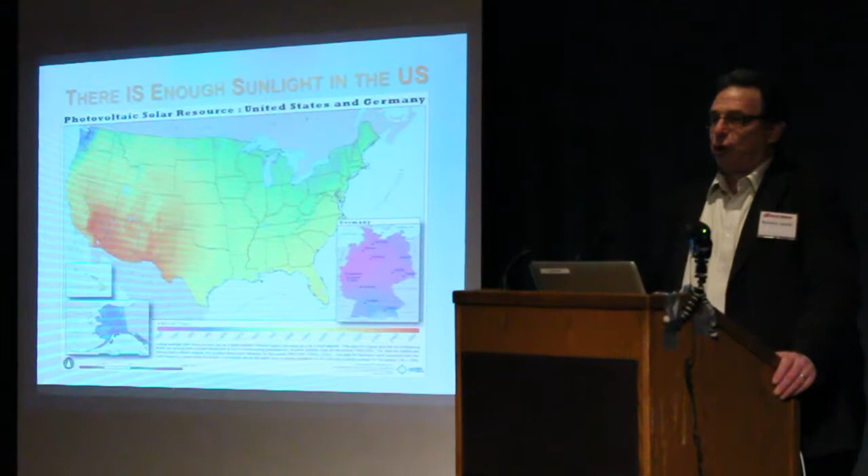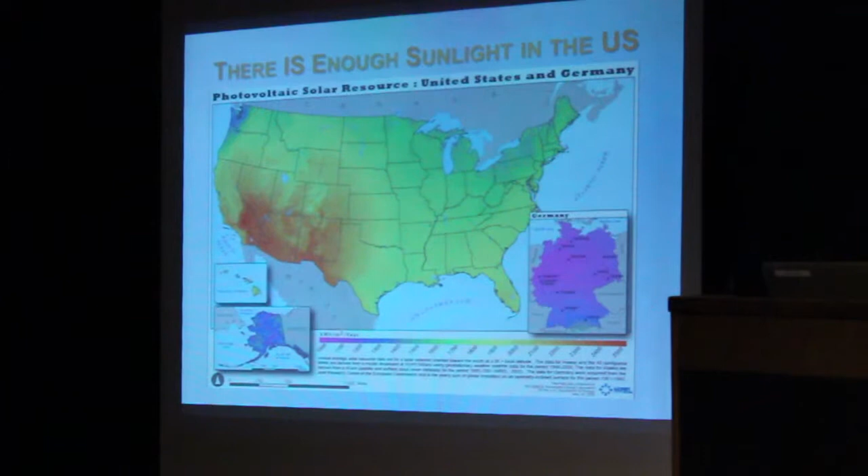That's pretty remarkable. Well, it turns out the largest solar power country in the world, not just per capita, is Germany, because they have policies that encourage it. And if you look at a map, that's Germany. That's the amount of sunshine they get on an annual basis. The closest in our country is Alaska and Seattle. That matches Germany. So if they can do it in Germany, trust me, we can do it in Chicago.

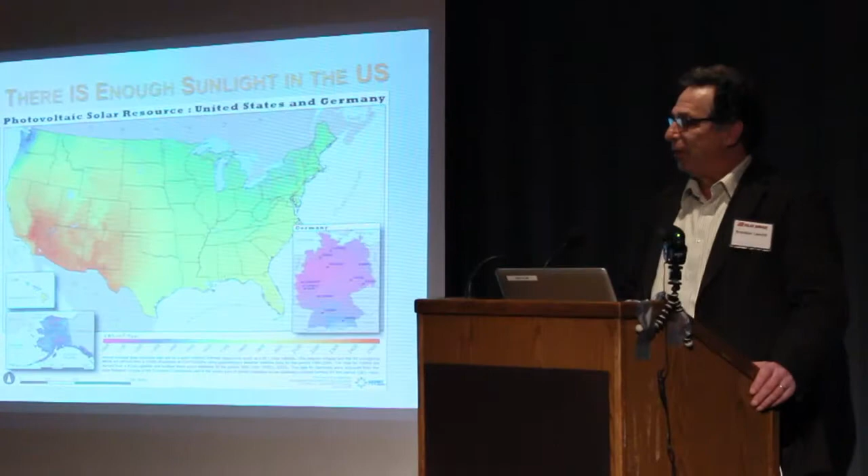Now, the coldest day of the year is also the brightest. So it turns out the further north you go, the more valuable sunshine is. We need it more. Don't use solar to heat your home in Florida. It's a waste of money. But here, we're going to use it 7, 8, 9 months out of the year. That's valuable.

And I talked a little bit about the shift to solar. Last year, in America, we doubled the use of solar energy over the previous 30 years. In 2 years, we'll double it again. That's how fast it's coming on. But we're catching up. China's ahead of us. Yeah, they have a lot of dirty energy, a lot of dirty coal, but they're also the leader in clean energy. Saudi Arabia is going to go from 0 to number 3 over this decade. They just realized oil's too valuable to burn. It's a great export product.

They got a lot of sunshine, a lot of desert, a lot of place for solar panels. They're going to go big. India is doing it as well. Europe is investing in solar plants in North Africa to supply electricity through a cable under the Mediterranean to Europe. So they're going where the sunshine is. And this is where the jobs are. These are jobs that cannot be outsourced.

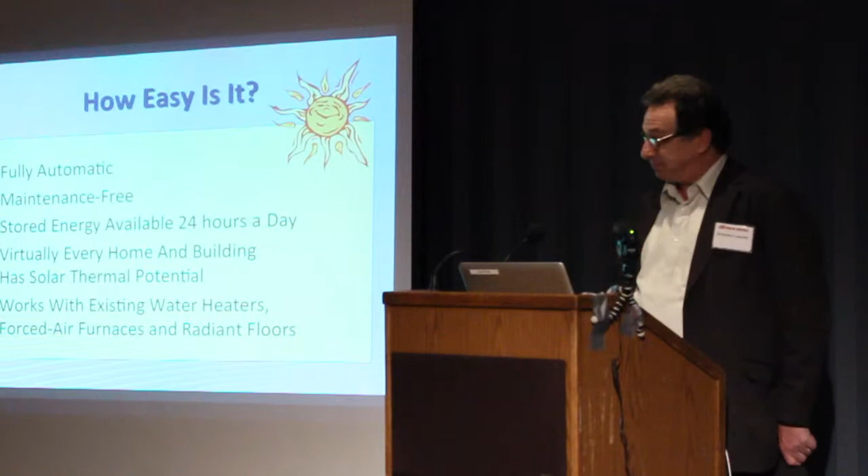And a 4x8 solar panel produces over 1,000 gallons of hot water a month here in Chicago. That's amazing, a little 4x8 solar panel. Think of a piece of plywood. But it's a glass-covered metal box, and it can make 1,000 gallons. A family of 4 just needs 2 of them.

And the nice thing is, those 2 panels, the CO2 displaced, which is a greenhouse gas contributor, we can reduce it to the equivalent of planting 2.5 acres of trees every year. So after 10 years, it's like you just planted 25 acres of trees. I've always wanted to do an ad where we have solar panels on the roof and we say, plant 25 acres of trees, because that's the equivalent of it.

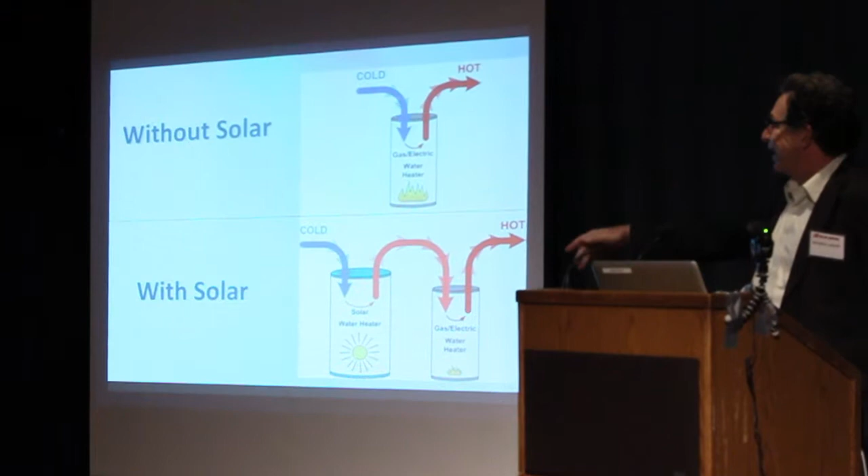So again, here's the simple description. Currently, you have a water heater: cold comes in, hot goes out. With solar, you have a solar preheat tank, solar heated. Cold water now enters that tank, it leaves, goes into the backup tank. 70% of the time, it's hotter than what the tank is required.

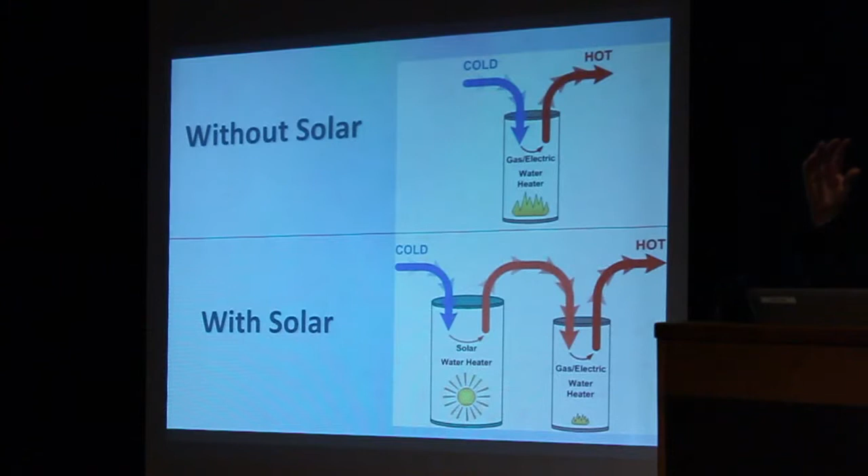In fact, we put a cooling device on our water to make sure you don't burn yourself, because we set our tank to 170 degrees. We used to set it to 180, but we found out it ages the tank. So we set it at 170, we blend it down to 120, 125, and then it goes into your water heater.

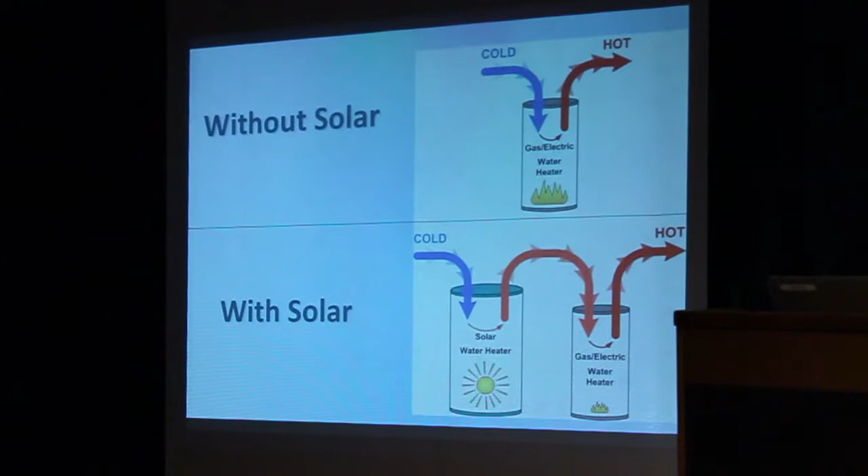Our combination system is solar panels. There's always a heat exchanger in between, because the water that we bathe with does not go through the solar panels—that would freeze. So we always have a closed-loop indirect system. We put the energy into storage, we preheat the water, and we have a nice coil in the furnace.

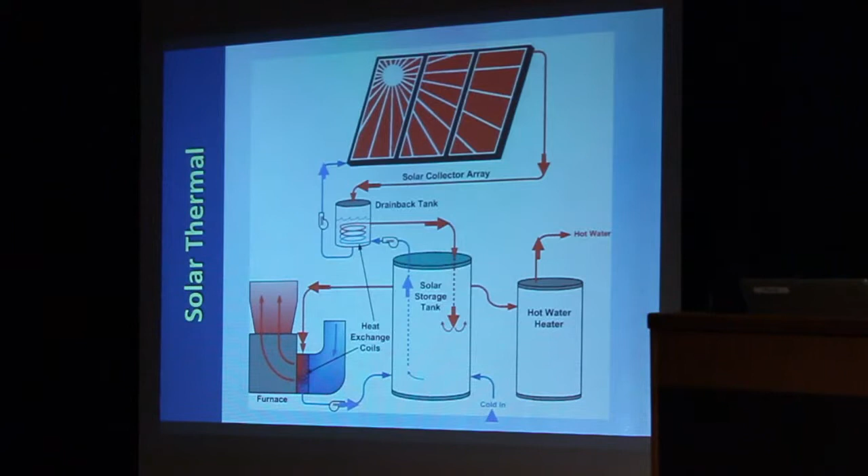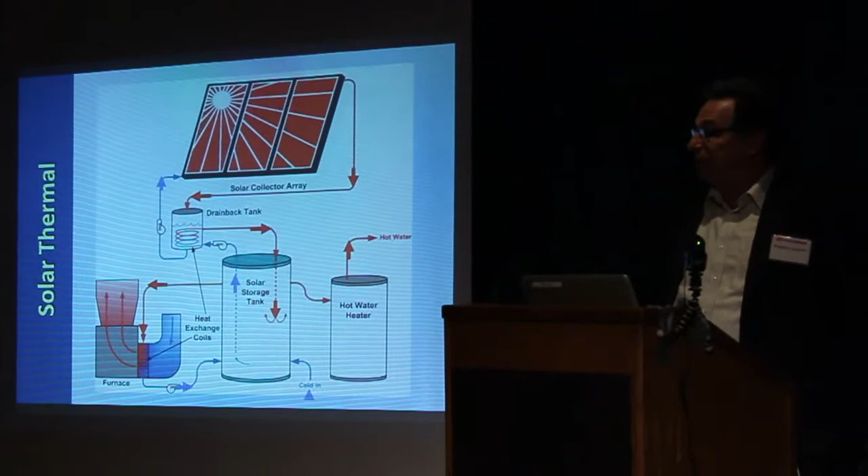Now, we'll do new homes that are built to higher standards. We can do a higher percentage.

There's an example. We work with radiant floors, there's the coil in the furnace. Sometimes we can deliver solar heat to a room that's hard to heat, so you don't have to overheat the rest of the house just to keep that room comfortable.

The one thing we don't work well with are radiators. Not too many in Northbrook, but when we go to Evanston or Oak Park or Chicago, there's a lot of homes with radiators.

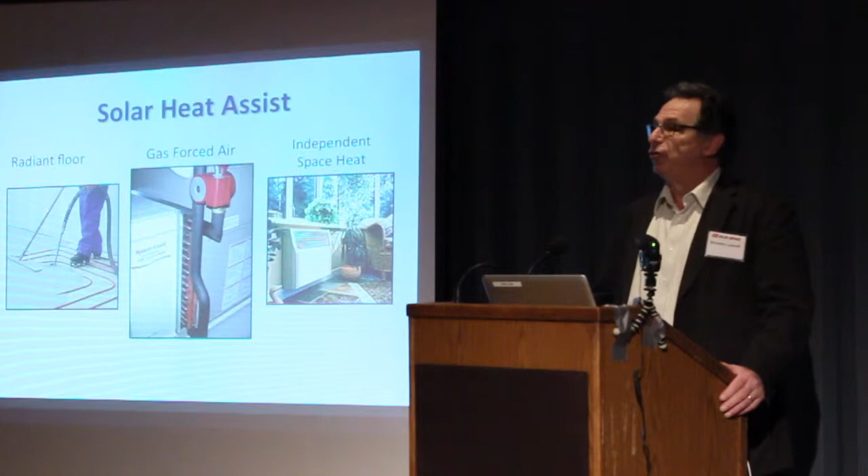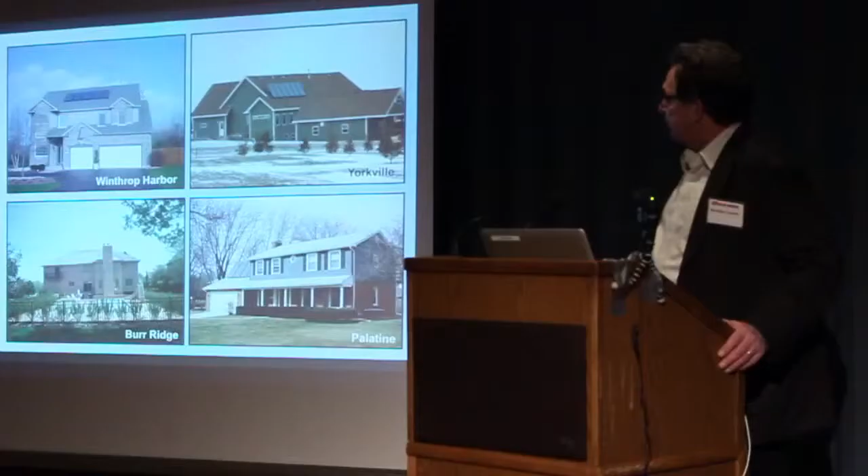They work at too high a temperature for solar to really be effective. So quickly, just a lot of examples of solar. Solar thermal panels should face south, because most of the time they're going to be on the side of the house in such a way you're not going to notice them, or they'll look like skylights. Once in a while, we'll find a house with an east-west roof, of course, but we point the panels south. We can still deliver a lot of solar heating.

We've done vacation homes where not only are we heating the water and heating the space, we're heating a hot tub. And some newer homes, 3 floors of radiant heat in the Chicago house are getting solar heated. Sometimes we'll put the panels on the garage, detached, just have a couple of underground pipes going into the basement.

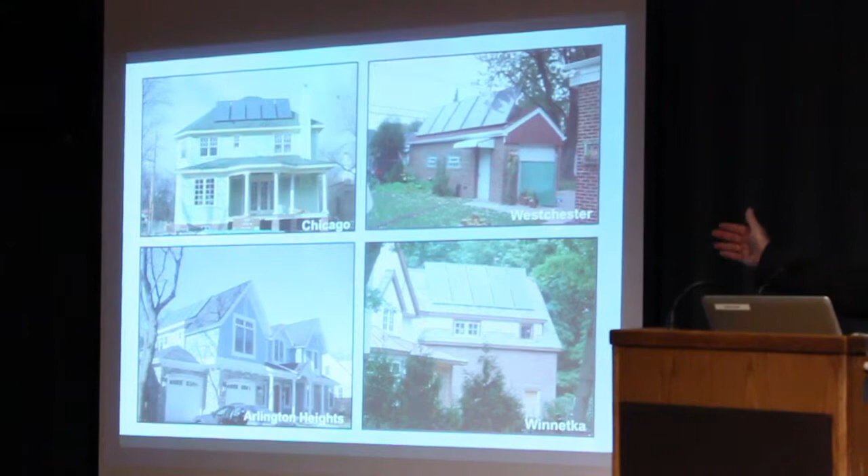Beautiful new home in Winnetka. This woman's involved in Go Green Winnetka, so she walks the talk, as we like to say.

Oh, there's that house in Arlington Heights. Did that a couple of years ago. It was an Energy Star rated. It got the highest rating of any home the rater ever looked at. It's about 1.5 times the size of the typical house on the street, has half the heating bills. All they did was super insulate the house with foam, get good energy efficient equipment, nothing fancy, and solar. They got half the heating bills.

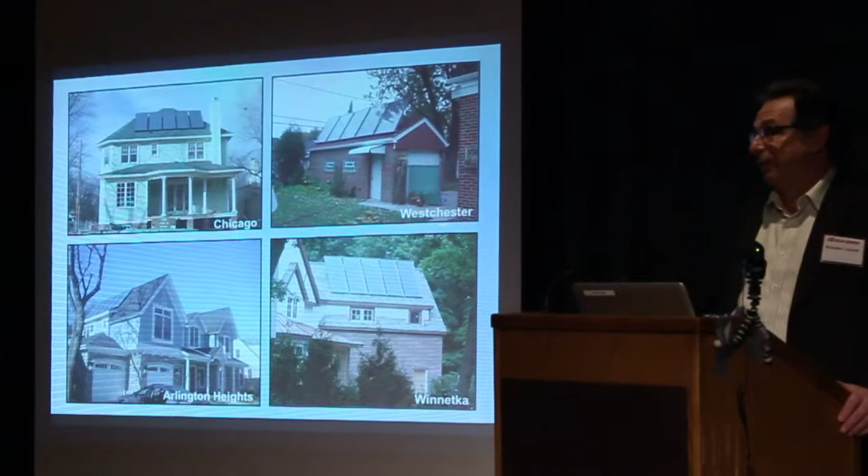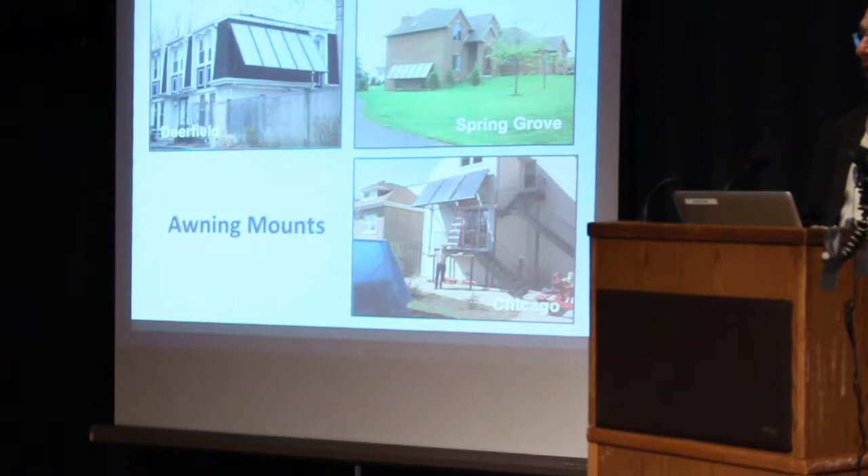Sometimes the roof isn't going to work, so we'll get creative and we can do an awning mount. We'll mount them on the side of the home. This lower picture, family was really happy we did it that way. They couldn't even use that room in the summertime. It got so hot. We cooled it about 25 degrees in August. Solar intercepted that heat. So we'll take a little credit for cooling as well as heating.

We get asked all the time about economics. Quick story about a family in Antioch. I met him in an energy fair. He was upset. He was on a budget plan where he paid the same amount of money every month for his gas bill. Gas company sent him a notice it's going up 50%. He got upset. He had a family of 4. We gave him a 5-panel system.

Chicago Tribune covered this in a story a few years back. After the solar was installed, his first gas bill for 2 months was $29. He complained to the gas company, and they recalculated his budget from $158 a month down to $70. They also issued him a credit for his overpayments of over $450, which covered his entire gas bill that year. So, you know, it does save money.

In fact, I got into solar because it's a less expensive alternative. If you're not using the sun to heat your water, you're spending more than you need to. It's really about economics. Yeah, it's great that we're helping the planet, saving the world, making it a little bit better for future generations. But it's really, the green I care about is what's in your wallet. And it's a better, smarter way to provide energy.

So speaking of how affordable it is, it's a lot more affordable than people think. A typical solar water heating system for a family of 4 installs for about $12,000, $10,000 to $12,000. But after incentives, you get 60% off, and the cost is down to $5,000. We double that when we deliver heat and hot water.

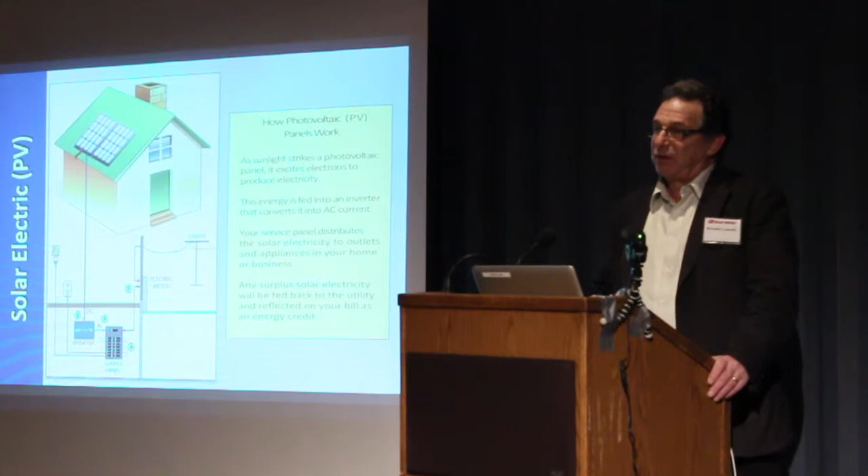Okay, now quickly we're going to talk about solar electric, because this is now the fastest part of our business. About 2/3 of our customers today, probably about 90% of our residential customers, are going solar to create electricity. And it's very simple.

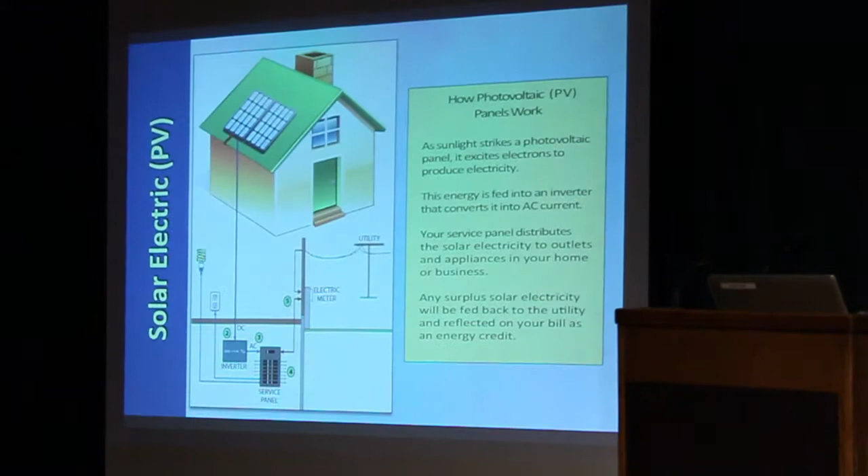This is a working solar cell made by SunPower. It's evolutionary, it's revolutionary. The only way electricity has been made over time is with heat, steam.

A nuclear plant, a coal plant, they all boil water, create steam, move a turbine. Hydroelectric uses gravity, but again, a turbine. Wind generators, turbines. Something mechanical, something moving. This is passive.

Sunshine hits this, excites the electrons, they jump out and look for a place to go where they're needed. There's never been a device like this before. And this is going to be the standard way to generate electricity on our planet.

It was developed in the 50s by AT&T to power repeater stations. It's a long way to run an extension cord or recharge batteries. Satellites, of course, are powered by the sun. The space station turned 15 years old yesterday. Solar powered, of course. So this is a very exciting technology.

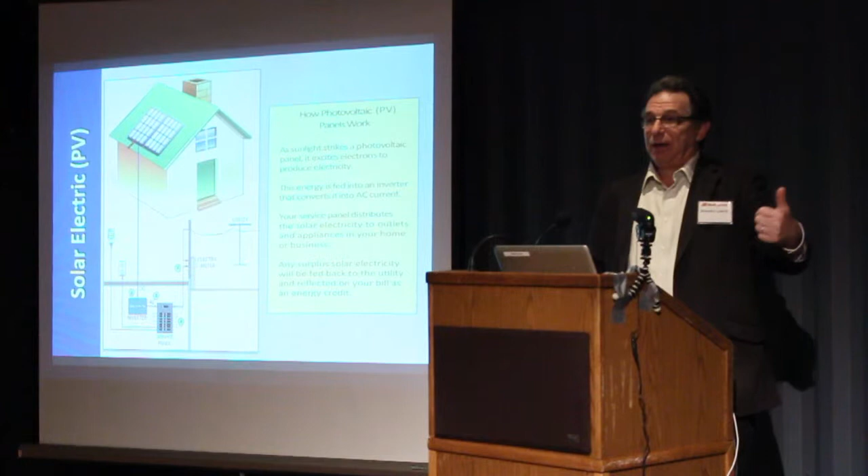What's changed over the last couple of years is something called net metering. It used to be when we installed solar, we tied it to batteries, because most of the time during the day we generate more power than the house needs. Batteries added to the cost, required space, maintenance, and there were safety issues as well. Very few of our customers use batteries today.

Most of them connect to the grid because the law requires the utilities now to accept that excess power and give it back to you later at full retail value. It's called net metering, and it's lowered the cost and simplified the system.

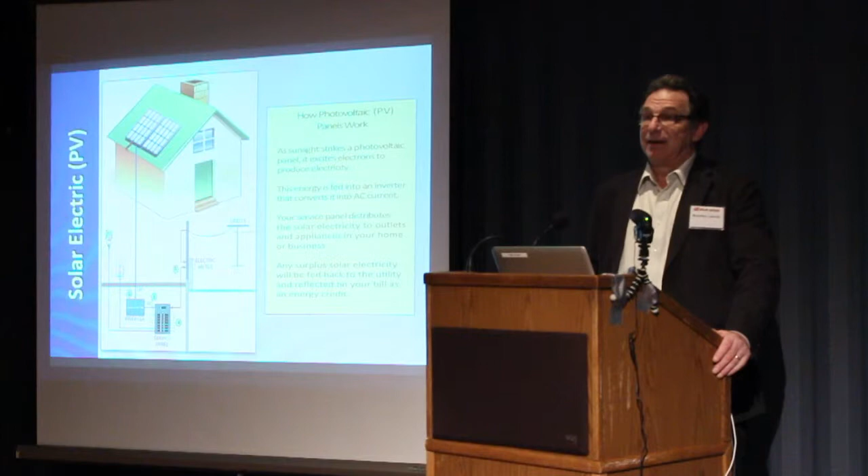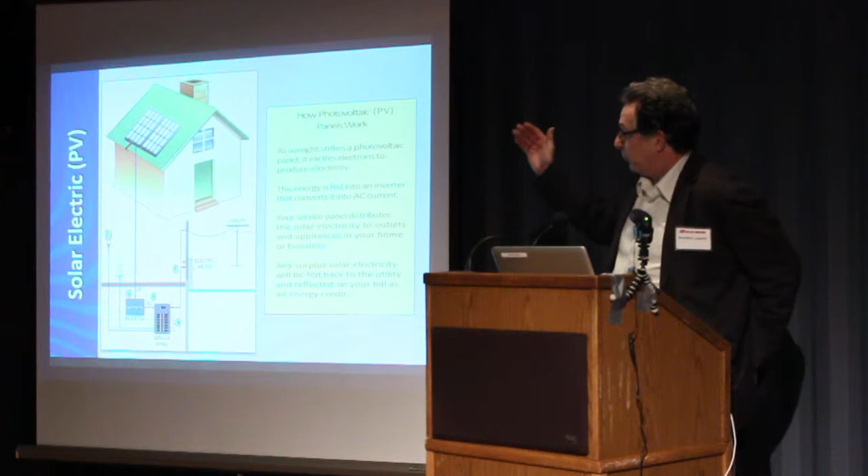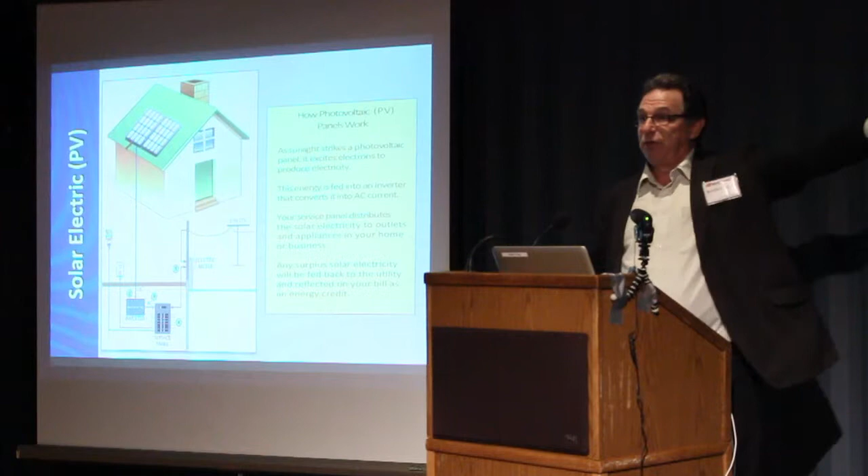The way it's installed is we install the solar panels on your roof or in your yard. We hook it up to an inverter which converts the DC power to AC. It goes right into your service panel. If there's a demand in the house, that's where it goes. If there's no demand, it goes to the grid. And your meter, some spin backwards, but they're now digital, so they count backwards.

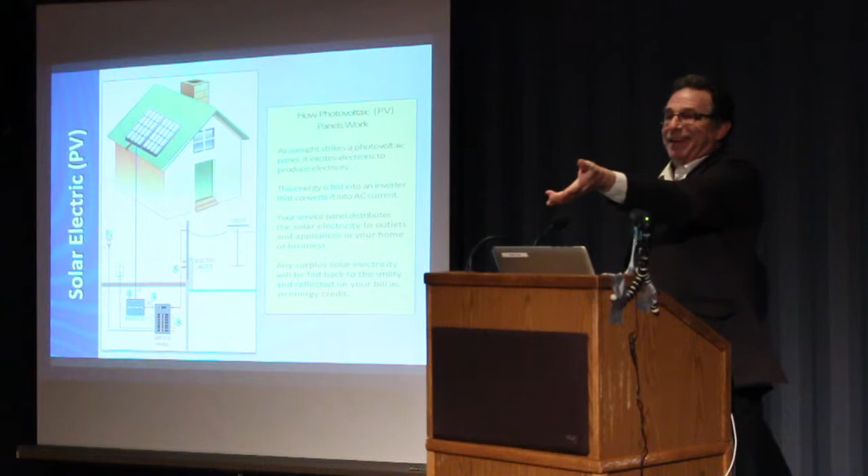We have a client here, on the second day, first day, he was so excited he saw the meter spin backwards. And I've got a picture of his house. I'll introduce you to him in a minute. Great day.

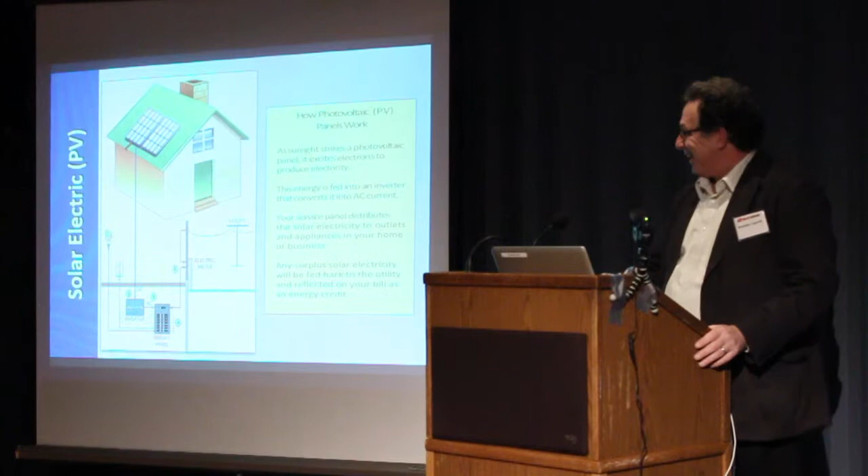Sometimes we'll do both. The one thing you'll notice is solar electric is usually at a lower angle. I talked about solar thermal being at a higher angle because we're after the winter sun. With solar electric, we're after the summer sun. It's longer in the sky, we need more electricity in the summertime, so aesthetically it's actually a lot more pleasing because they're going to lay flat on the roof.

Some of our customers really like solar, really like it. We used the south side of his home for two systems that tie into his radiant floor system, so we put solar facing west. With solar electric, we can actually put them to the east or to the west because the sun is high in the sky when you want it to work the best. Obviously south is the best, and a year later he did some landscaping, and we installed 70 panels next to his house as well.

And here is our Northbrook home. About 6, 7, 8 years ago, we added solar heating and hot water panels. And this past August, we had actually installed this brand, the highest rated solar panel made in the world, on Peter Sternberg's house. Peter, stand up. He's a solar pioneer for Northbrook. Deserves your accolades, and the system's working well.

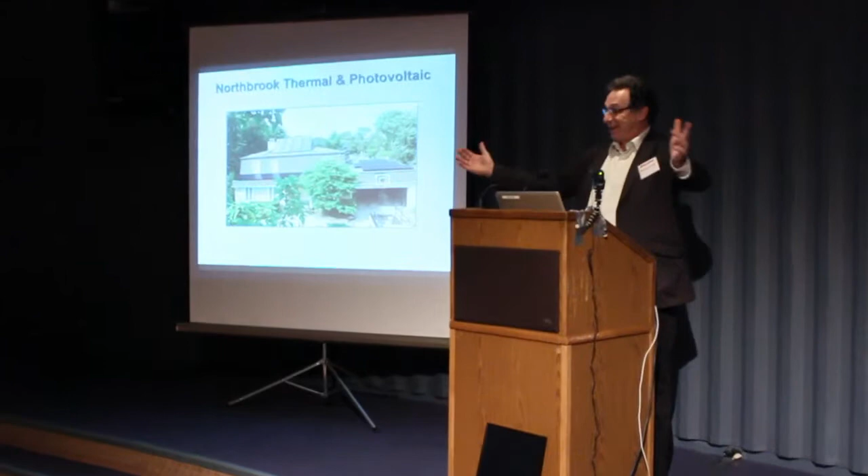He's extra happy today because when he purchased the system, the state had a program where they paid 25% of the cost through a rebate program. They only opened it one day a year, but it's been going on since 1999, and I'm happy to say that every single client who ever applied, well, we do the work for them, has received a rebate.

Well, after Peter bought his system, the state issued new rules for the rebate program. It was no longer first come, first serve. It was going to be a lottery. They only have about $1.5 million, and there's more demand for it than that. Now it was a crapshoot, and as I told Peter, crap was the right word.

But 2 days ago, we learned that Peter was approved for his rebate. So I knew he'd be a lot happier when he came here tonight. So we're happy about that.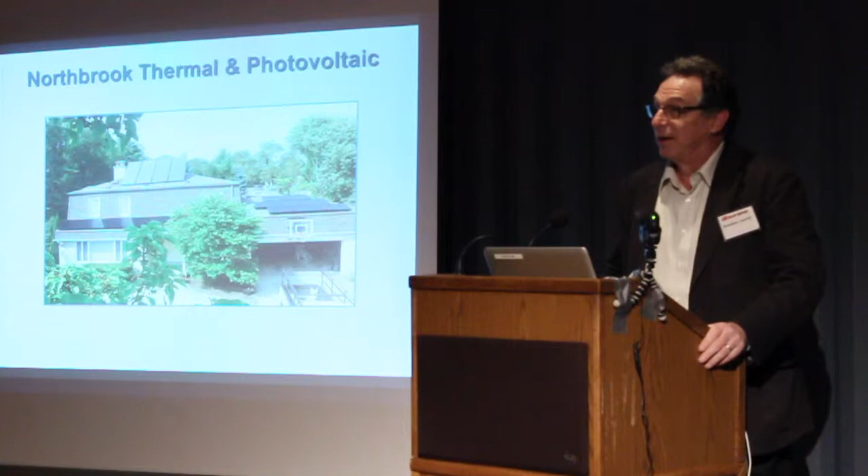They paid 25%, and the federal government paid 30%. Again, that's almost too good to be true. Here's another Northbrook home. This man works for Invenergy. It was a newer house. Invenergy, they develop wind farms. They're one of the biggest wind farm developers in Illinois. One of the reasons coal plants are having a hard time, and nuclear plants. Wind is now cheaper than coal, and it's getting cheaper every day.

This is an absolutely gorgeous house in Glencoe. Nate Kipnis is the architect. It's only the second platinum LEED, platinum's as high as you can get, platinum home in Illinois. And to look at it, you say, really, it looks like that house has always been there. Well, it's got a solar electric system, solar heating and hot water system, super insulation, and just well built. And there's been hundreds and hundreds of people who have toured this house, including the local congressman.

And when you look at it this direction, you'll see how it works. So on the far south side at the steeper angle, this is the solar heating system. Over their bedroom where they have a green roof terrace, we have a small solar electric system. And it's just a very nice home, fits into the neighborhood. These people are very active in showing how well it works.

Yes? Point of interest, I've read a lot about this house. Actually, the homeowner, the husband, he graduated from Glenbrook North. There you go. Great. In fact, we were just at his temple on Sunday, Temple Jeremiah in Northfield, and it looks like that temple wants to put solar on their building. And there's more funding for religious institutions to go solar as well. In fact, we did the Glencoe Church about 2 blocks away last year.

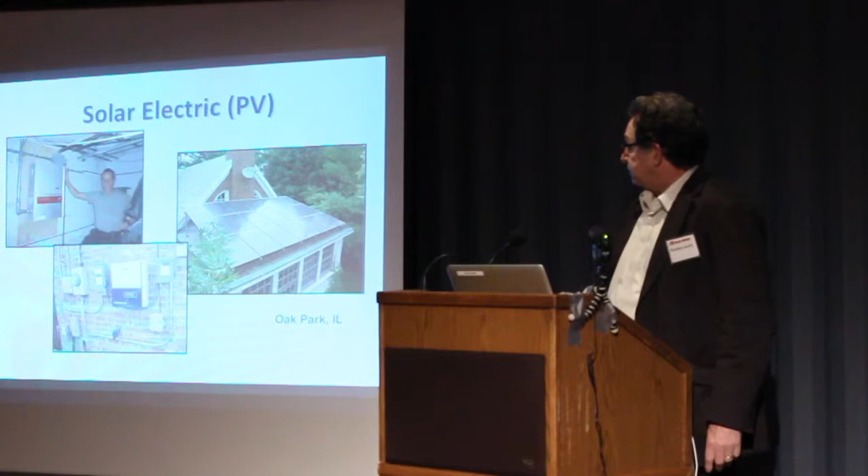Gentleman in Oak Park, a couple years ago, went solar. He's had a few open houses. He is net metered. And actually last year, he ended up not using all that extra energy. When you net meter, you have a year to use it up and then it zeroes out, kind of like rollover minutes on cell phones. So he got to the springtime. We had a really sunny winter. He is very energy conscious. And he was a little upset because he just provided free energy for ComEd. So he solved that problem. He bought an electric car, and now he charges it during the day. And he went to time of day as well.

A year ago, January, it was mild enough. We installed a solar electric system on this senior center in Waukegan. All our systems come with monitoring. It's monitoring from the web. We get monthly reports. You can see exactly what it's doing in real time and historically. And the developer was so impressed with it, he took the monitor out of the mechanical room and put it in a glass display case in the front lobby. He wanted everyone to see how well it works.

This is my absolute favorite project we were involved in. Harvest Time Foods on Lawrence Avenue near California, Lincoln Square. He won Businessman of the Year award the year he put this in. He needed a new awning. Well, why not incorporate solar panels as part of the awning? He also did a total lighting upgrade, LED tubes. All the lighting has changed in there. His electric bills are down about 40%.

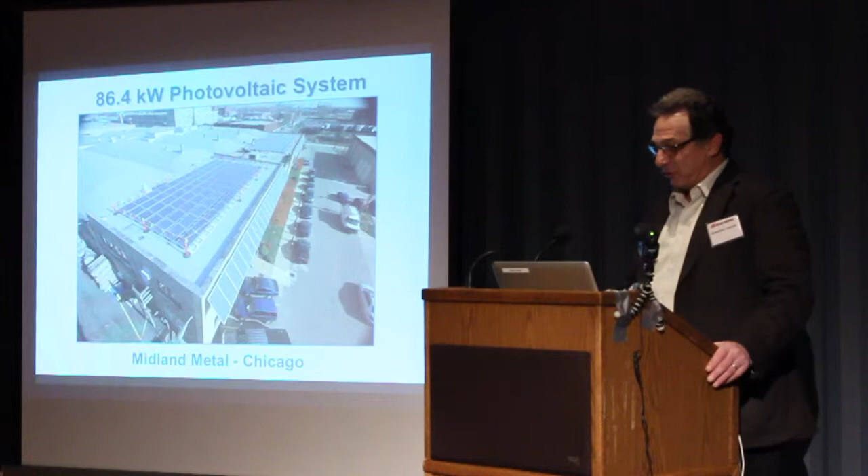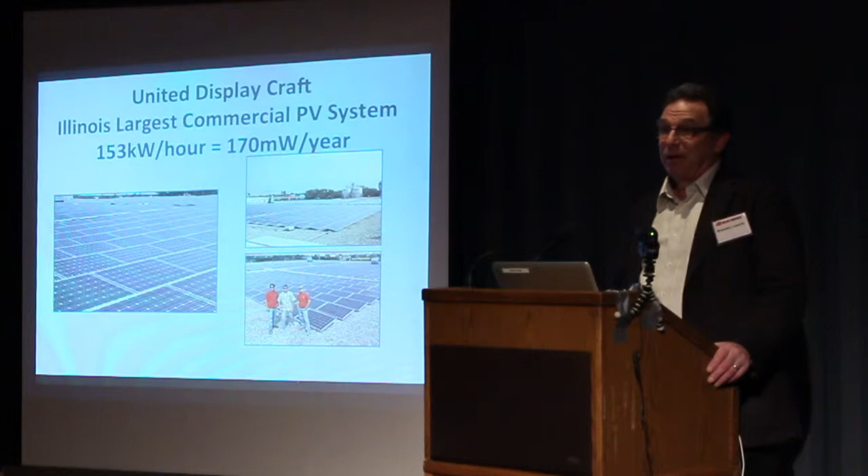Our biggest job to date was on United Displaycraft in Des Plaines. Last week, they signed a contract for another 800 panels. They can expand this to 200 more kilowatts. The nice thing is, it's 1/3 bigger than the previous system. It'll be about 10% less expensive because the solar cell costs are coming down.

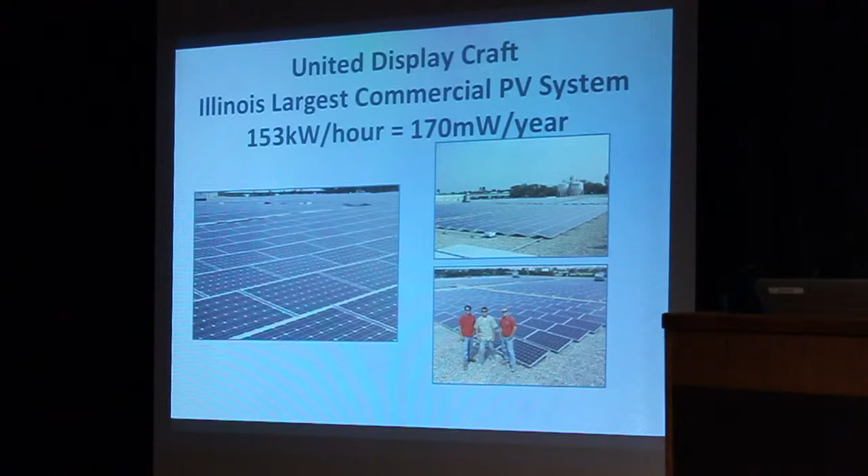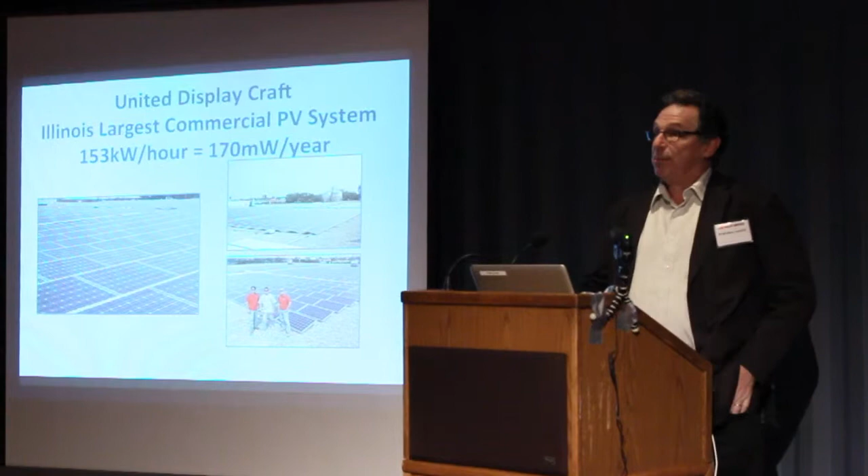Now, I know I'm running short on time, but there's one more benefit to our solar customers here in Illinois: you can sell the intangible item called clean energy through a renewable energy certificate. Basically, it's a carbon pollution offset. Certain states tell polluters, clean up your act or pay for someone else's clean energy. Now, in Illinois, we can only go to 7 other states and buy their certificates. Illinois has started their own program. Funding hasn't come around properly yet.

We were able to secure a 30-cent per kilowatt solar renewable energy credit for our client. Now think about that. They're saving about 10 cents a kilowatt on their own energy bill, and someone's paying them 30 cents for the idea of clean energy. This company still keeps the energy. They just give a certificate to the polluter in Pennsylvania. So this payback, instead of being 8 to 12 years, was 3 to 4 years. That's why they just bought another system, because we're grandfathering them in, so they're going to still get 30 cents.

We've got a small system on our building in Niles. I get a clean energy certificate through the city of Naperville. They own their own utility company, and they raise enough extra money that they can send certificates to people in Illinois. I got mine through the Illinois Solar Energy Association.

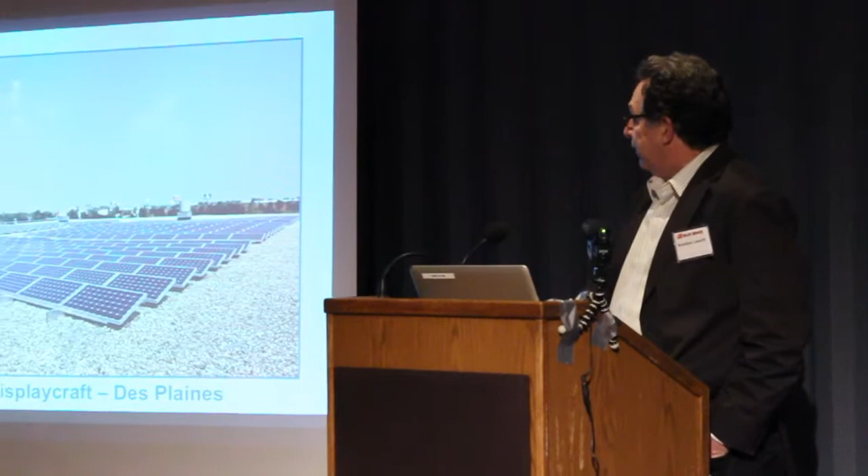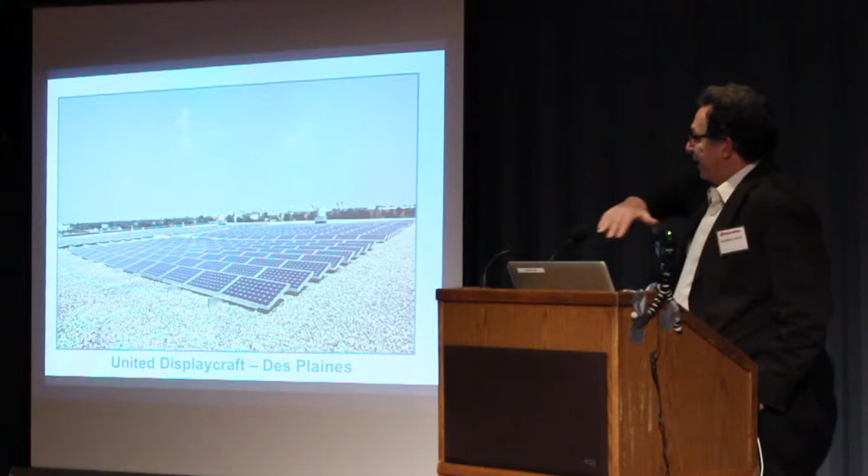Okay, there's another picture of it. This is on the edge of O'Hare Airport. O'Hare Airport's 15 feet away. We had to get FAA approval. And they made us lower the angle of the panel a little bit, which means it works really good in the summertime. But because the angle was lower, we got more panels on the roof.

Did you know the biggest solar farm in the United States in an urban environment is in Chicago? Yes, it's true. Brownfield, where you can't build, you can't put a school, can't put a park, can't put a home. Perfect. Old industrial sites, great. Let's put a solar farm there. 33,000 solar panels, powering 1,500 homes in West Pullman.

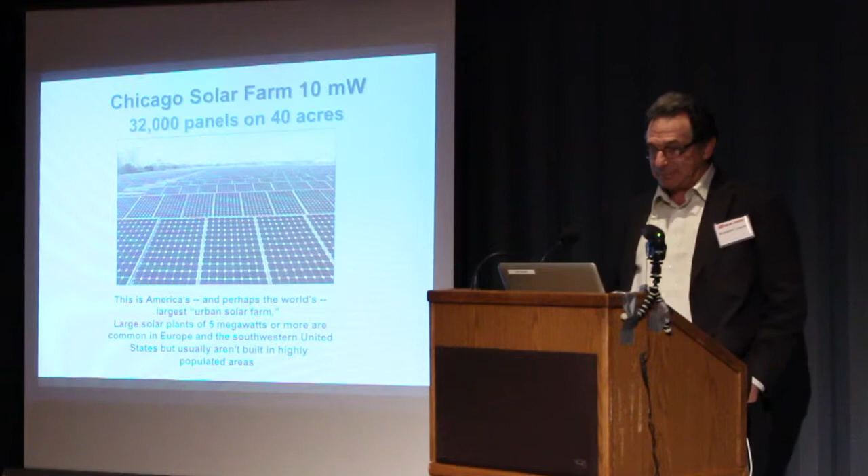Glenbrook South. They were building an addition. Got a call from an architect that we've worked with before on schools. Says, how many panels will it take to heat the pool? I said, how big is the pool? I gave him a number. Need about 100 panels.

And then I asked him, well, how big is the roof? Okay, he gave me that number. I said, well, we can put 70 up there because we have to stay certain feet away from the edges of the roof and can't have them too close or they're going to shade each other. I said, that makes sense.

He said, what did it cost? We just finished a 68-panel job for Governors State, so I gave him a number, about $500,000. I said, but I think we can get you about 60% free money. He said, okay, we can sell that. I said, why don't you install the roof curbs now, because it's going to take a year for the funding to come through. So the school took the gamble. They installed the roof curbs at the same time they built the roof. Otherwise, they'd have to re-roof, and that's going to add to the cost.

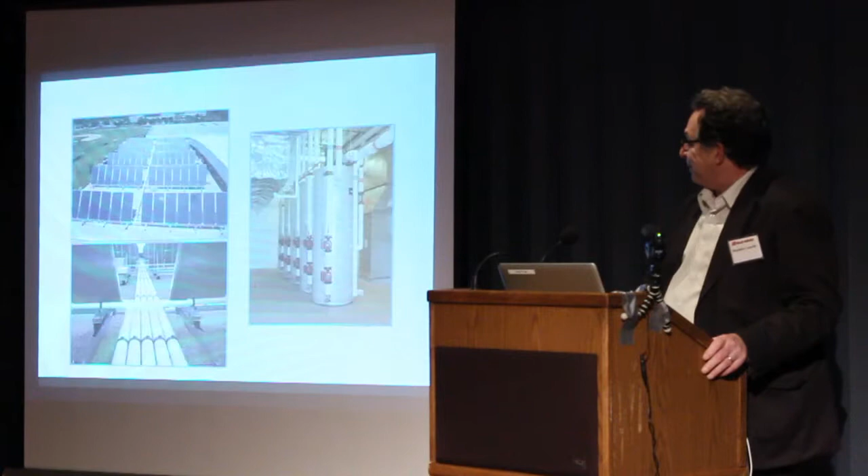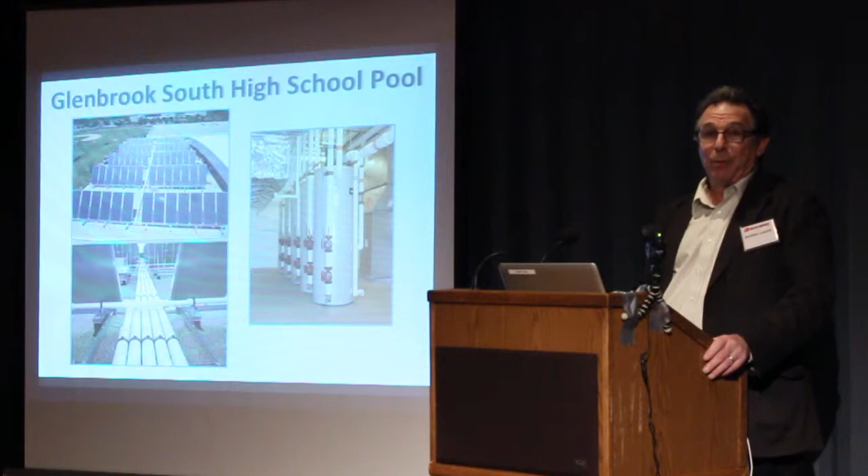There's an aerial view, and there's some of our heat exchange devices. Everything you see here, our crews do. We're unique in that we install what we sell. There's the pool. We just finished this job for Northeastern University, heating their swimming pool. Just finished it in July. Just got a nice write-up. You know who paid for that system? Students. They created a green fee fund, $3 a semester. We also got funding from the Clean Energy Foundation. Didn't cost the school a penny. The students paid for it. It's heating their pool.

There's Governors State. That's one of our first swimming pools. The governor came out and helped us dedicate it. We're also heating the water for the building. The governor helped us dedicate this system for Shriners Children's Hospital. It's an electrically heated pool that elevates so the kids can go in there in wheelchairs.

25 employees for every patient at the Shriners. Kids, nobody pays a penny. Shriners Children's Hospital does not take government funds. So when you see those Shriners in those funny hats, they're getting old, but they do fantastic work. And we're happy to donate our labor on behalf of the Shriners.

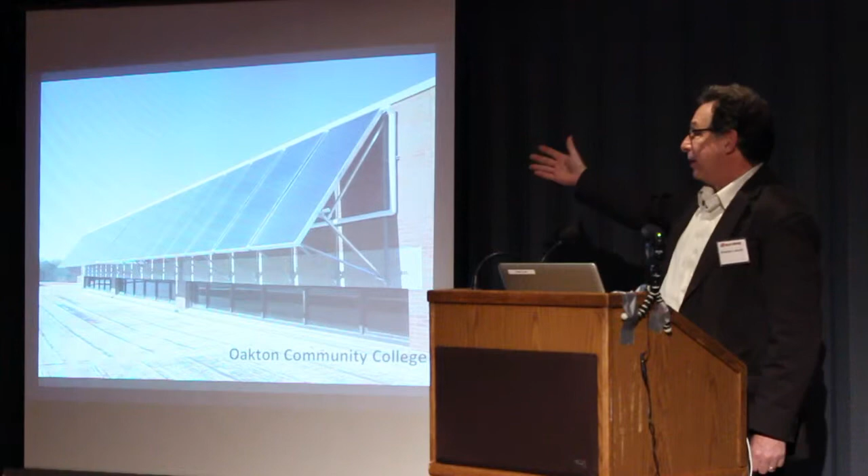We do a lot of work on schools. I'm supposed to talk about schools. We've done about 30 schools throughout the state. Notre Dame has 3 systems of ours on them. Evanston also has 3. Oakton College, some of you have children going there or will go there. That's outside their cafeteria. We actually put our equipment in a display booth outside the cafeteria door in the hallway so the students can see it work as part of a learning experience. It's an awning mount, and we love awning mounts. They don't tie up the roof, and it's a visible example. We've done 5 systems for the College of Lake County. We've got 5 more going on.

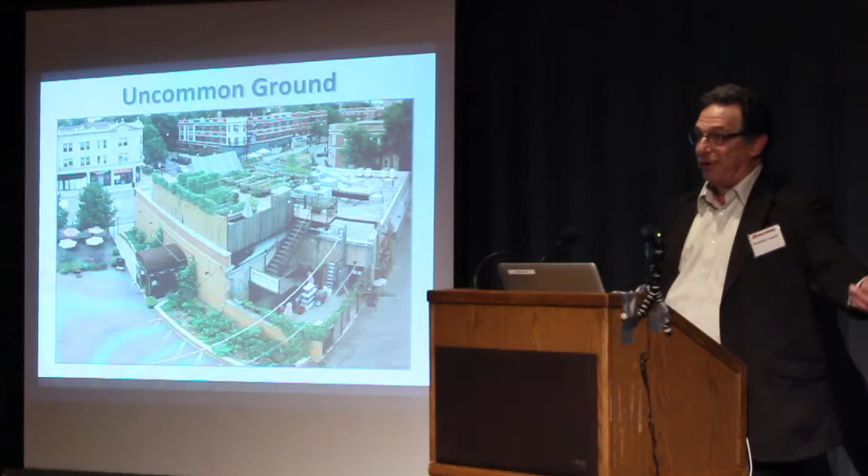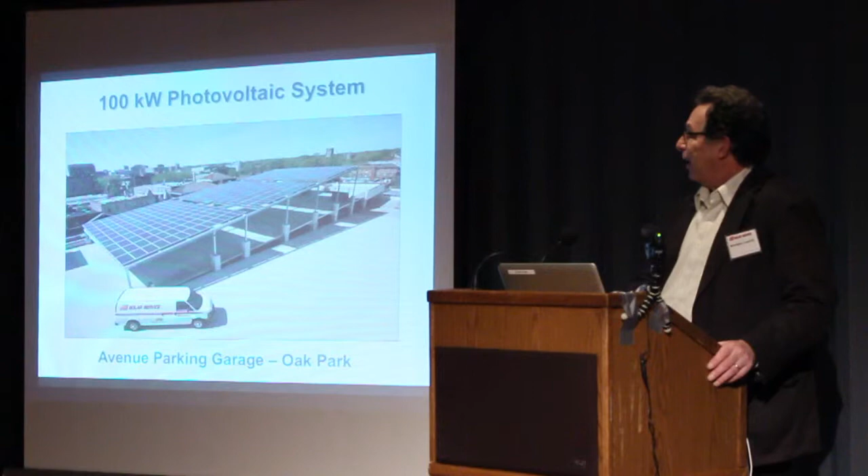Apartment buildings are big. I'm going to go fast now because I'm running out of time. We do laundromats, we do restaurants. Uncommon Ground, great restaurant, the greenest in the city. They grow their own produce, their honey. There's a view of the Devon business. They just built a home with Nate Kipnis. That's on the garage, it powers the whole house, and their electric car. Greenworks, Christy Webber Landscapes. We do public works buildings. The train station in Aurora is solar heated. Avenue Garage, we love this system. 100 kW system on the 6-story garage.